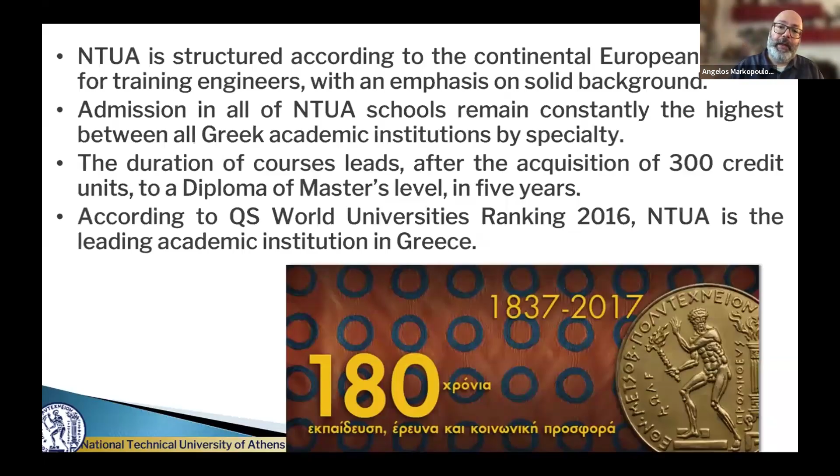So maybe, after I have convinced you that it is worth mentioning machining and simulation, and you would like to know more about this, you can check NTUA's web page and see the postgraduate and doctoral places that we have there, and maybe you can apply for a place there.

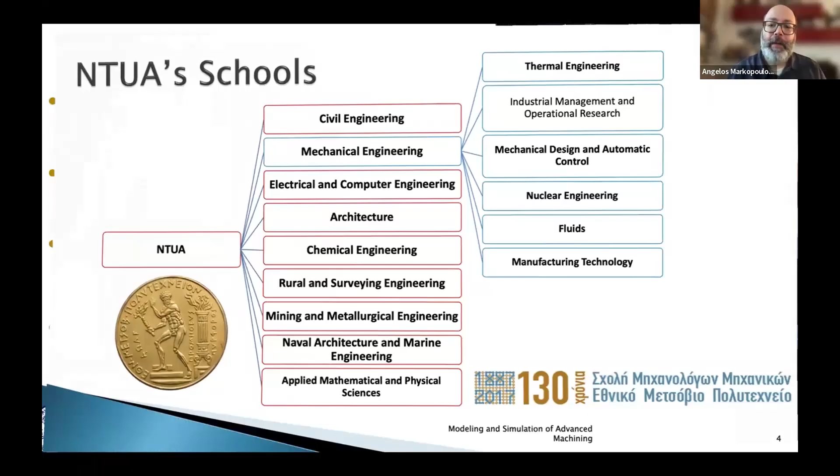Research is our main goal. Education is equally important. We have more than 250 European projects, which ranks us 10th among EU organizations, and there are a lot of them. Not 10th as a country, but as a university. So it is rather important.

And of course, we have several distinctions on that, because if the income of the university is largely from research, you realize that we also have the infrastructure that we would like to have. This is a necessity for Greek modern times, because although we are a state university, the support that we get from the state is very low, so we have to turn and show our expertise to the European Union and get our funding from there.

We have a staff of about 400 professors, which also means that we have like 15,000 students. We are not a big university in terms of students, because we are only a technical university. But nevertheless, if we look into the technical specialties of other universities in Greece and abroad, I would say that we are quite big.

And there are a lot of opportunities to visit and do your internship or postgraduate studies in Greece. I will not bother you more about this.

Let's go and see why machining, or advanced manufacturing, is important. Actually, why modeling and simulation of machining is important, and how we can bring a couple of things together in order to assist ourselves in improving as engineers.

I will start historically by mentioning that machining is very old. We know we have specimens from ancient Greece, ancient Egypt, India, China, from all over the world, almost 4,000 years ago, metallurgy and science that man used to manipulate metals in order to produce something. But nevertheless, the systematic study of manufacturing processes, and especially machining, is no more than a century old.

A little bit more, let's say. We will start our journey in a scientific approach for machining from the beginning of the last century, about the beginning of the 1900s, the first industrial revolution. Probably some of you, if you are into machining, will recognize the names of Taylor and Merchant, people who were the first to establish some laws and give us explanations on how machining was carried out. Nevertheless, in order to model initially analytically, and in the future with numerical methods, I'm going to focus right now on how this has evolved.

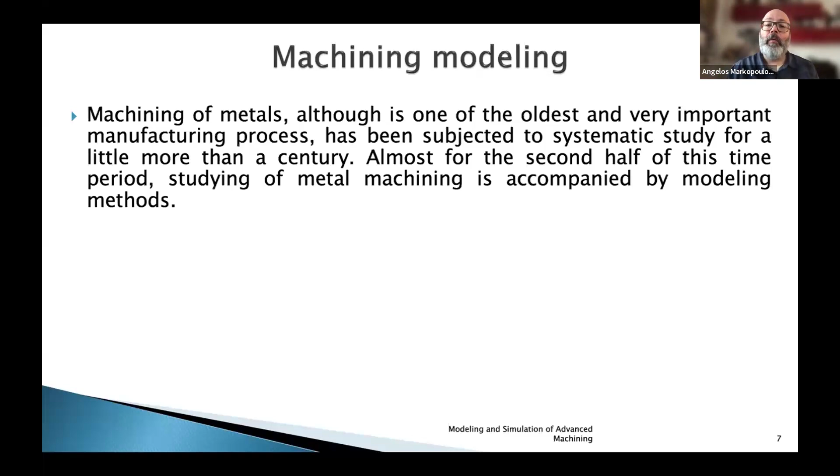It is very closely connected to the materials, to the machines, to the computers that we have, so that we can do more sophisticated modeling in the future. And now I am in a pleasant place to say that modern machining and modeling go hand in hand in industry, and provide solutions for engineers.

And why would we like to have modeling? The initial objective was to provide a theory, an explanation behind some phenomena that we could see from experimental work, and our brain, which has the ability to see patterns, had realized that there are patterns there. But what is the explanation? What is the real purpose? What is the real reason behind what was happening?

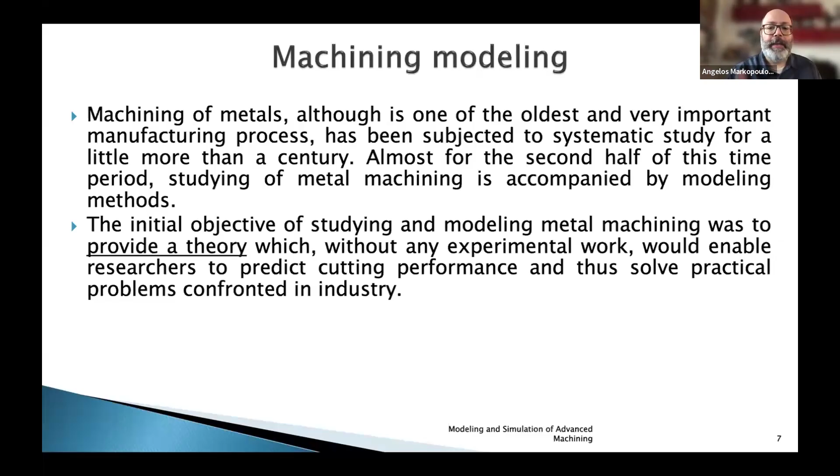So a theory was formed through modeling, tested and validated through everyday practice in life. And one very important thing: using this knowledge to predict the future. Predicting the future is always very useful, believe me. Predicting the future means we were able to predict cutting performance, optimize cutting performance, use new tools, make industry stronger and better.

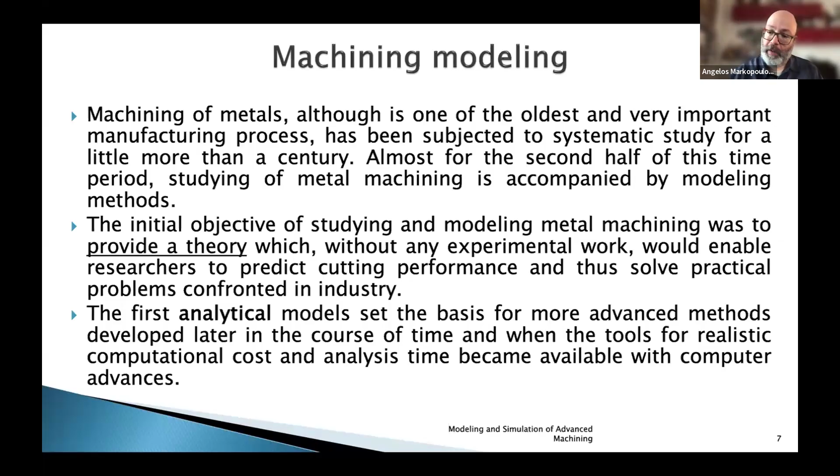So as already pointed out, the first models were analytical, equations solved by hand, which could give us a semi-empirical solution of what is going on. But soon, when computational tools became available, some new methods were presented, and one of them, of course, was the finite element method.

And I have in my mind at least one book, not paper, that speaks against this model and why it is wrong. But nevertheless, because of its simplicity and because it was the basis for more sophisticated models that came in the future, I think it is important to mention it as it is.

Of course, the theory evolved. We have the theory for the shear plane, the shear zone, multiple models that came into existence from gaining more insight from previous models and integrating this knowledge into the future.

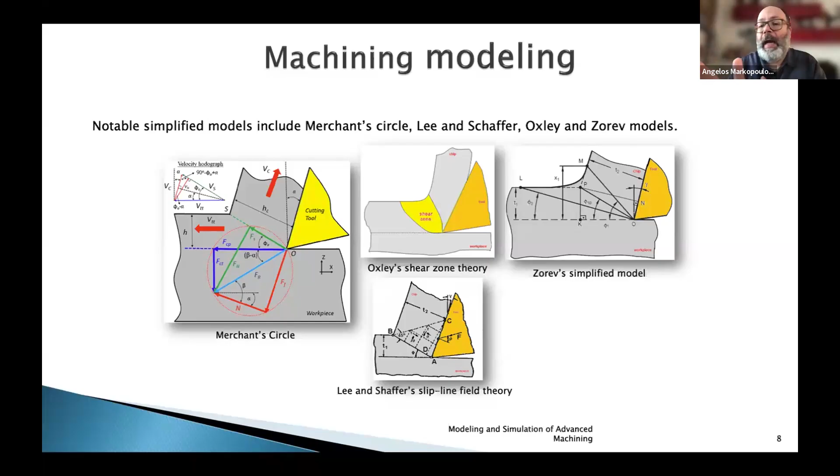You can see also that some of these models are simply qualitative. We do not have any calculations to make there, just a way of thinking on what happens. But this has evolved also much more into taking account more laws of physics and making our models more physically aware. This is a term that is more and more used today because of the artificial intelligence that has also inserted itself into machining and modeling of machining.

Because usually artificial intelligence is data driven, it takes data, a black box, and a result. But if we have physical knowledge, then sometimes we have even better results.

So in the beginning of the 70s were the first papers that came into scientific journals about the finite element method and machining. Of course, the finite element method was introduced earlier for other problems of engineering. I'm talking about the specific pair of finite elements and machining. And since the 70s of the last century, there has been an explosion of using this method in producing results.

So over the years, and with the subsequent increase of computational power, because this plays a very important role, we had several advancements, like for example the existence of commercial finite element software, or even commercial software that is solely dedicated for machining methods.

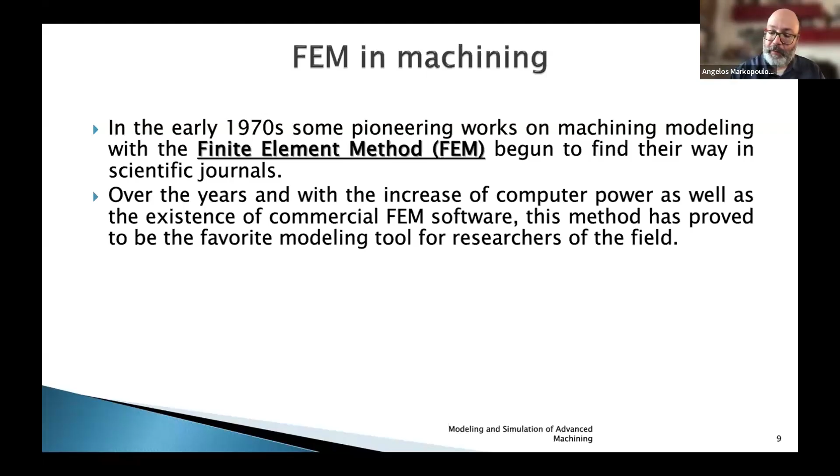So you see that there is a growing interest in these methods, and with the tools that we have today, there is always more to explore.

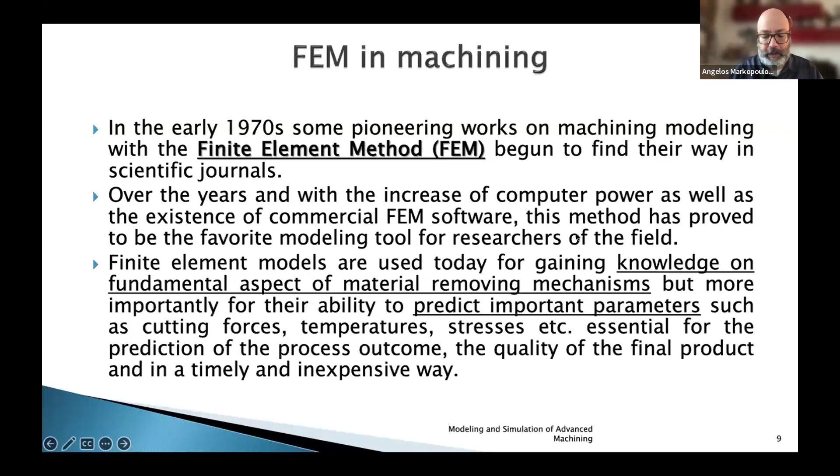But allow me to say that even for advanced matters dealing with how we treat machining, fundamental knowledge is always there and always important. So I wouldn't say that predicting and optimizing procedures is more important than fundamental knowledge. I would give them equal value, these two things that we can achieve.

Many of you, if you have a background in machining, already know what orthogonal cutting is. It's a two-dimensional representation of how a wedge slides on a surface and removes material. I say it in a very quick way, but it has, of course, some other aspects as well.

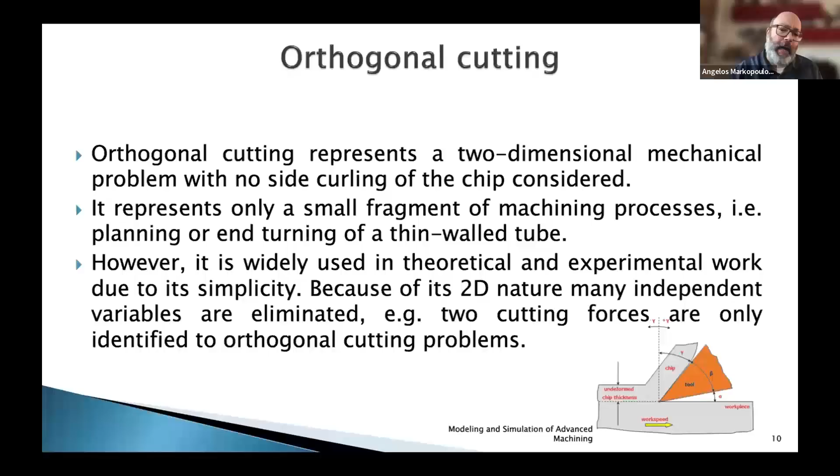This is basic, this is where we started, and this is the first finite element modeling procedure that we had to apply in order to see that it works. I'm not going to go into more details because it is rather fundamental, but if you have any objections, I will be happy to answer any questions.

What I want to point out here is that through this modeling, we have realized that in machining there are two deformation zones that need to be taken into account, both in practice and in modeling. The primary deformation zone is the zone ahead of the cutting tool.

This used to be considered not a zone at the beginning, but a plane. But it was quickly realized from models and experiments that it's not just one plane, it's a whole zone that is deformed in front of the cutting tool. In this zone, the material undergoes severe change in shape, meaning the material tries to resist. We have the so-called hardening of the material because of the strain rates applied there. At the same time, the material has elevated temperature because of the high plastic deformation.

There is also a secondary deformation zone, attached to the chip side of the tool, and because of friction, this area is also at very high temperature. So the problem of modeling cutting is to see what will prevail: hardening of the material due to strain hardening, or softening of the material due to high deformations and high friction between the tool and the chip.

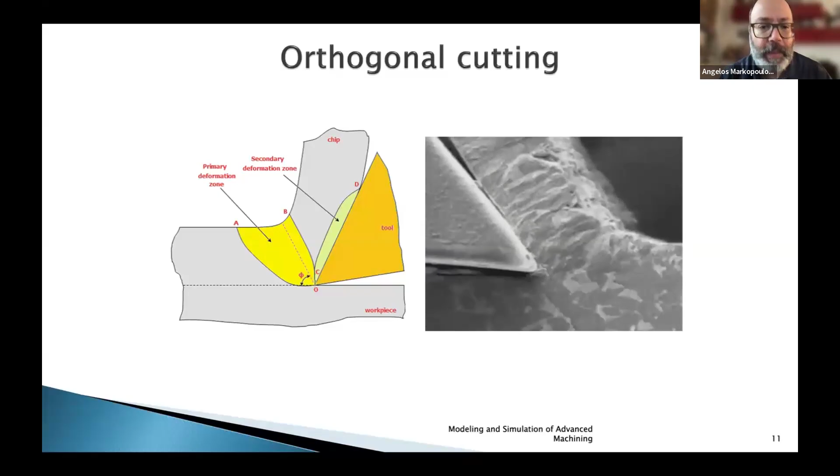And whether there are parts of the material under the influence of one phenomenon or the other. So this is the initial and most important problem we have to solve when we model machining. Actually, this is where the problem starts, and I will explain in a few minutes why I'm saying that.

So, as I said, strain hardening causes the material to exert more resistance to being deformed and cut. Cutting is a deformation in the shear plane, and there's also high temperature due to elevated heat. It has been shown, and we knew this before modeling, that these two very important parameters also influence many other things in machining, such as the wear of the tool and the surface characteristics of the part being produced.

So there is interest in focusing on these two areas, which are very close to the tip of the cutting tool. The first approach, especially when computational cost was very important and our computers were not so fast or so big, was to concentrate our modeling only where this severe deformation takes place, focusing on the tip of the tool.

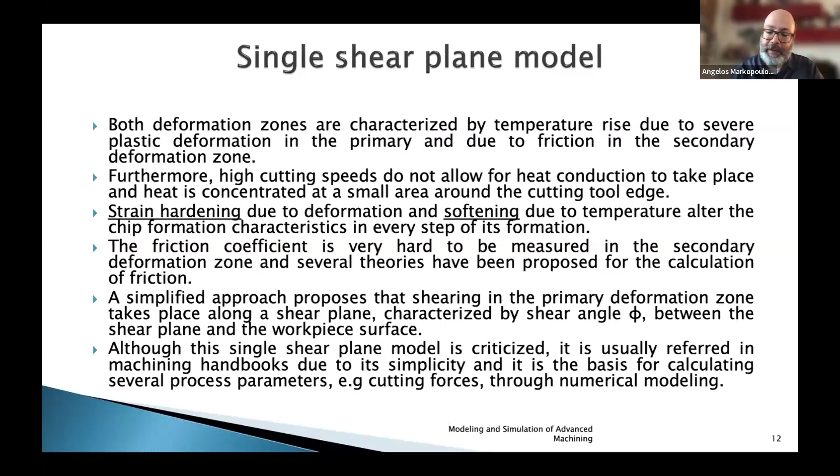And of course, we have to take into account several mechanics about that. I'm not going to go into details, this is out of the question, because I would speak for like 10 hours here if I did that, and I don't want to bother you so much.

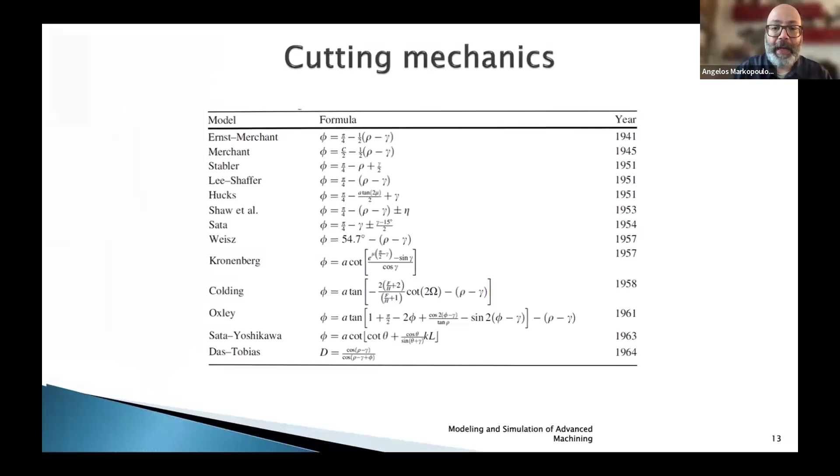But I have here a list of different models that have been introduced about the shear angle plane present when cutting materials, which has evolved over the years.

And now that we have set the problem, let's see what is the solution. So, finite elements, you would argue. Finite elements would be a solution, because it is a very versatile, very agile method, which is able to solve nonlinear problems.

The problem is not purely mechanical, it is thermomechanical. There is strain hardening, which is mechanical, and elevated temperature, which is thermal. Of course, with the change of the parameters of the material, there is also a non-linear change of the properties of the material, because nature is non-linear. So there is non-linearity, and we have to focus on the tip of the tool and the formation of the chip.

Here there are two challenges that we have to address, and they are important. When I talk about this, you will say, okay, this is self-understanding. It is not. Let me give you an example.

The first and most basic problem we have to face when modeling machining, actually when modeling anything, is to provide accurate data for the model. We have to give input, but this input in machining is most of the times problematic. Why am I saying that? You will see in the slides coming afterwards that we have to address our material as an equation, a constitutive law, as it is called in the language of modeling machining. And this constitutive law will give our software a way to understand how this material will interact with our tool.

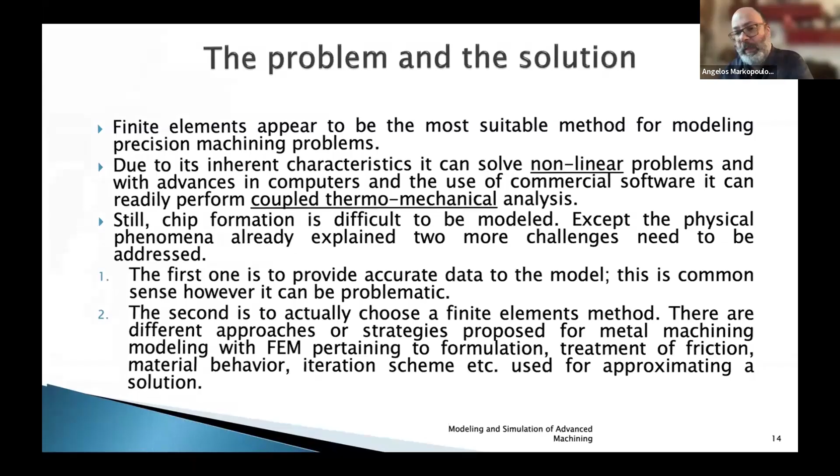It is finite elements, and although, as I told you, with commercial software it is rather easy because you see a very good interface, and it's very self-explaining what you have to put there, and press this button and do the calculation — yes, but our engineering thinking has somehow to give an explanation to the results. And if you have garbage in, then you have garbage out. So you have to be very careful on how you solve your problem, because then you will know that you have the right answer to the solution.

The nodes communicate to each other by a way that we define. And by manipulating one of these tiny elements, there is a wave of changes over the other elements as well. But doing this for only one very small piece of your geometry is much easier and much simpler than doing it for the whole.

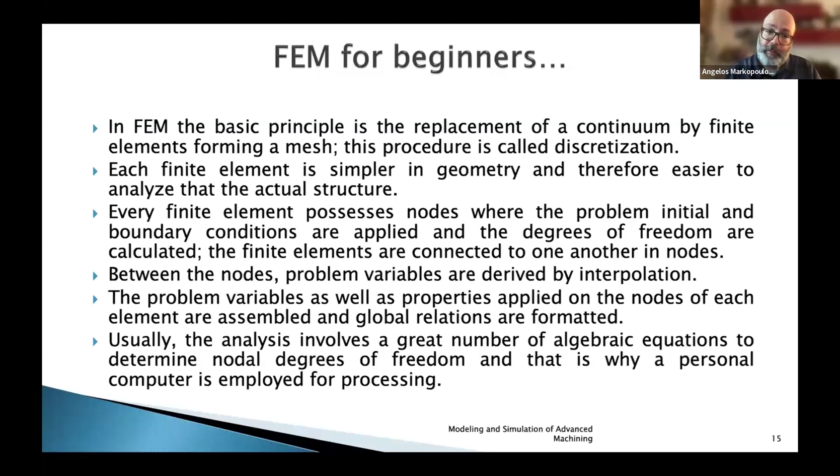So the drawback is that at the end of the day, you have to take all the equations from the nodes and solve them at the same time and provide you with a result. Of course, this needs to be done by a computer. And the finite elements have three distinct steps.

The first step is the so-called pre-processing, where you give all the data that you want for the problem: geometry, the physics you want to put there, the laws behind it—if it's thermal, for example—the boundary conditions and the loads wherever you want them to be. And this will form a matrix equation, then a solution.

Usually what commercial software sells is the solution, so it is the solver that they have developed over the years, and this solver has some very specific characteristics.

The third step is the post-processing, where you collect all the data. That data can be collected over time or over space, or both at the same time, and then provide different steps, snapshots of what happened during your analysis.

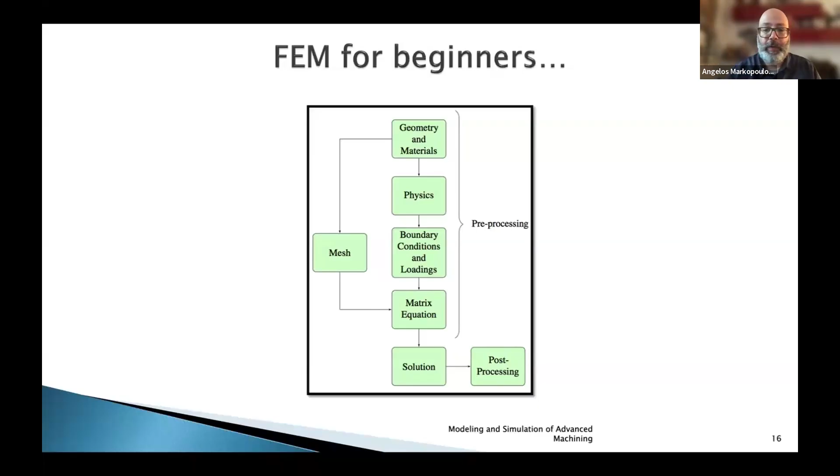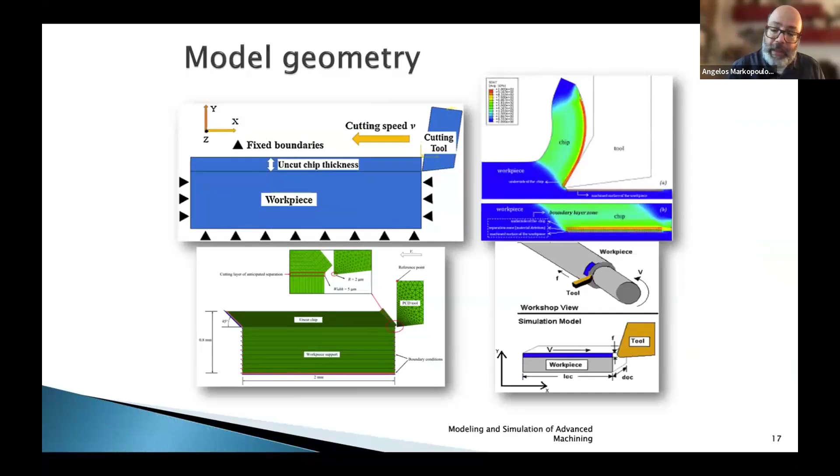The model geometry for machining is usually as simple as orthogonal cutting, but today, as we have more computational power, 3D models can be seen as well, and I will show you some examples in the slides to come.

You can see that model geometry plays a significant role in machining. We know this from practice, but here is a simple explanation: if the tool, for example, is wider, then the primary and secondary deformation zones are also wider. This plays a role on how the material will act and how the chip will be created.

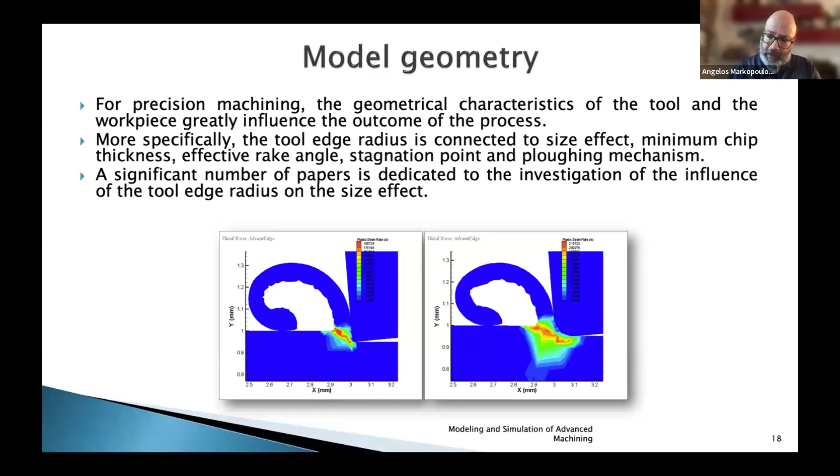And of course, although some people would say geometry is given and straightforward, geometry is something that needs to be carefully thought out and inserted into the program in order to have the results that you would like.

Here are some examples, growing from orthogonal modeling and giving it a third dimension to oblique cutting, which is a little more complicated, or to even more sophisticated 3D problems, where you don't just want your program to give you a result on cutting forces, but also to see how the product will look like after it has been machined.

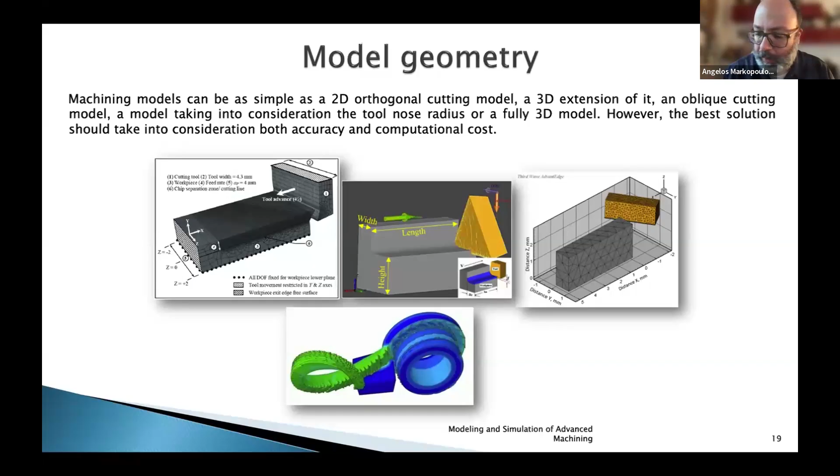And of course, this evolution goes hand in hand with rising computational cost, which thank God we can today accommodate and solve with the computers we have in hand.

As you have already figured out, meshing—applying a mesh on the geometry—is a very important step. This is why most of the pre-processing tools we use have an automatic mesher to do this for us. The mesh is not something that can be straightforwardly determined.

Why does this happen? Because the finer the mesh, the more nodes you have, the more equations you have to solve, and this means more computational cost.

But there's a point where you cannot go to a minimum nor beyond a maximum, because if you go too large, the mesh won't be able to follow the geometry. If you go too small, the gain in accuracy is negligible and not worth the computational time.

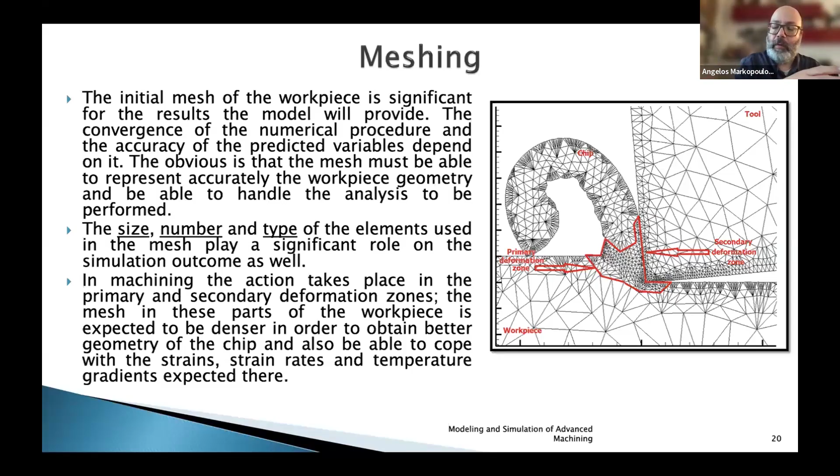So where the action takes place is in front of the cutting edge of the tool, in some very small amounts of material near the tip of the tool. But this phenomenon is dynamic, because the nose, the actual tip of the tool, moves continuously to create the chip.

Before that, types of finite elements, just some of them. It's not an exhaustive catalog, and there are peculiarities and innovations in some programs that have elements others don't, allowing you to integrate more complicated problems.

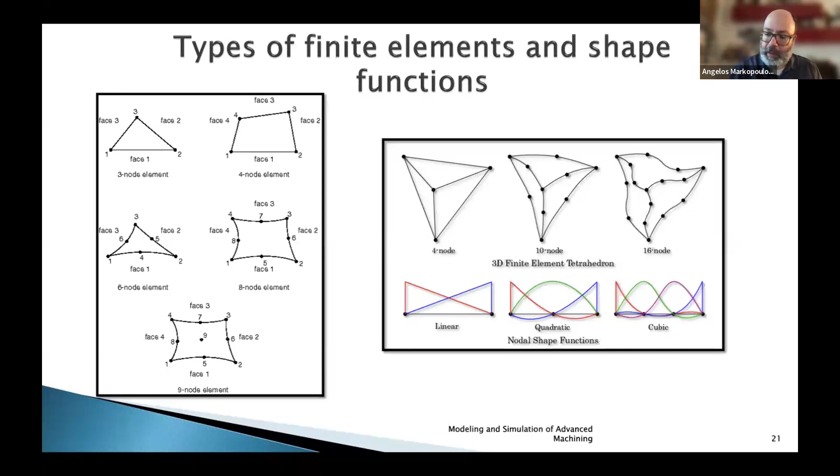You can see there is a wide range of how nodes communicate with each other. They can be linear or of higher order, and there can be nodes not only at the edges of the meshes but also in between, so you get a better interpolation between the edges of the element.

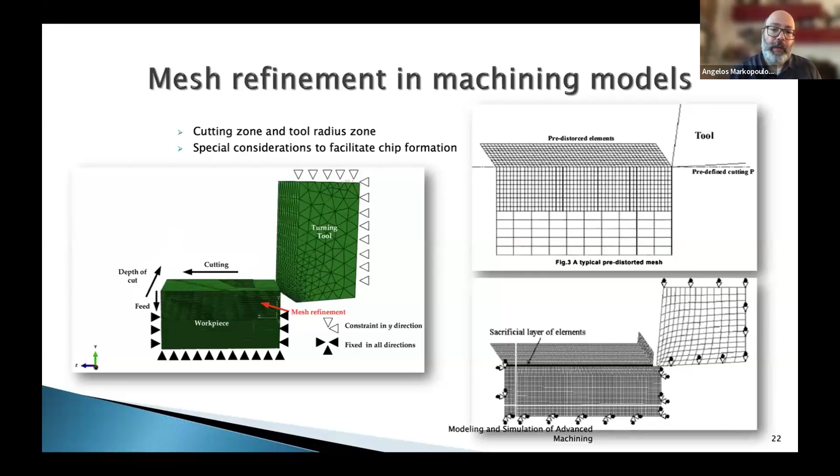And of course, a tool used from the beginning in machining was the so-called mesh refinement. So what we do is use finer and more elements near the tool tip than on the rest of the volume or area, depending on whether it's a 2D or 3D model.

It's not very clear what it is, so you see these elements are very, very small. So not very big deformations are required in order to make them distort too much.

So how can we avoid stopping, killing your simulation because of numerical reasons and not reasons of what actually happens in real life? There was a technique adopted over the years, very common today in many programs, where after each step is finished in the procedure, a new mesh is applied, unique and suitable for the specific time step.

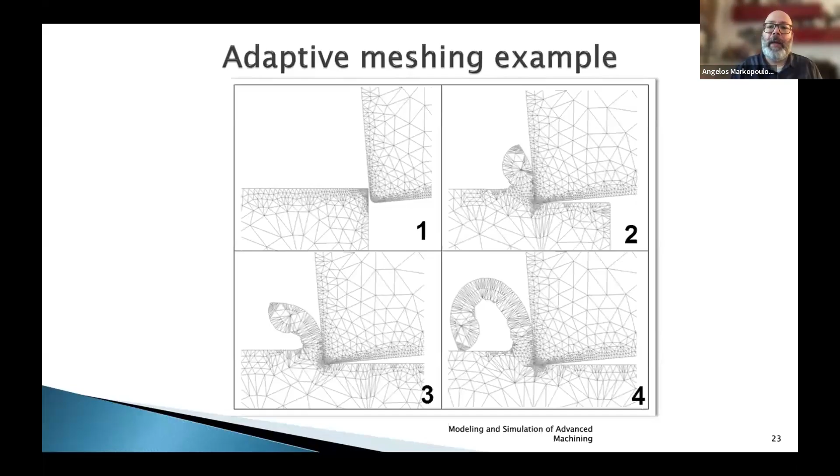You would wonder how chip is created. We know how chip is created in real life, but how is it created in the finite element method? Usually there is a chip separation criterion that we use, and this depends on the scheme of the finite elements that we would like to use.

Is it a geometrical separation criterion, meaning when the tip of the tool is very close to a node, this node is separated into new nodes, thus simulating the creation of the chip? Or is it a physical separation criterion, where the stress, for example, has a threshold, and if this threshold is exceeded, the node is again split into two different nodes?

But there are also methods where the chip is created without a specific separation criterion. It has to do with the topology of the grid. This third option is, let's say, more realistic, because the other two appear like a zipper opening, which was not very realistic.

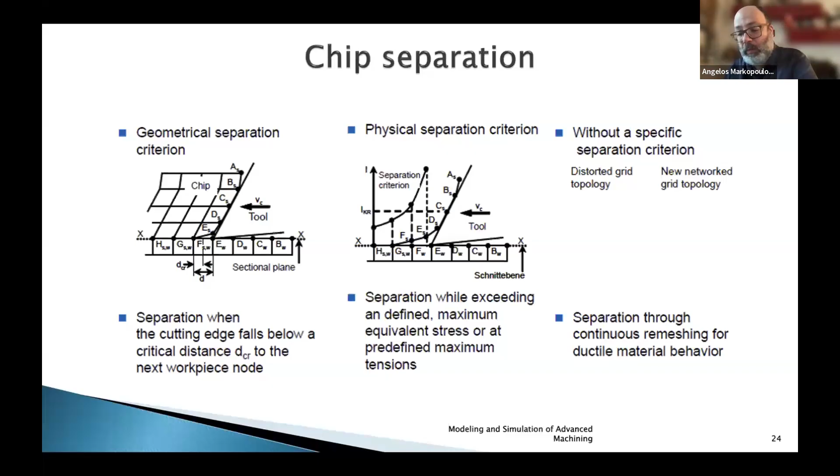But in order to achieve this third method, we have to apply this continuous remeshing, so that the simulation is as close to reality as possible. I will elaborate a little bit more in some future slides that you will see.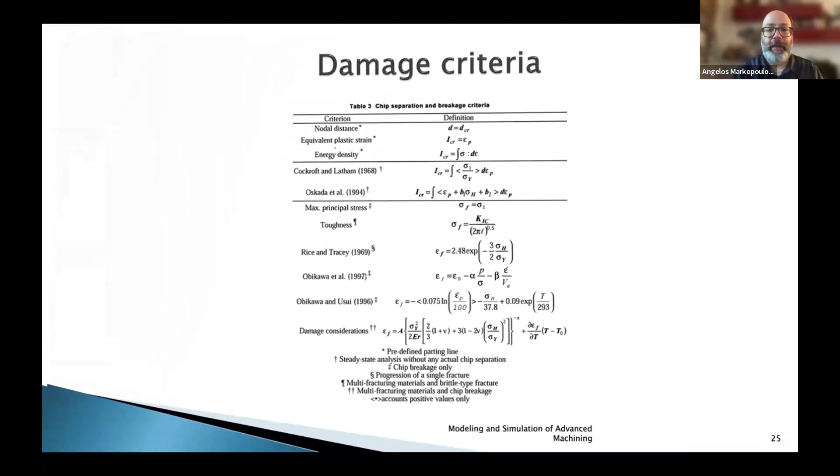And here are some damage criteria that are applied in the case where there is a need for a damage criterion for the creation of the chip, and the thermomechanical coupling. Actually, thermomechanical coupling is not so easy as it sounds.

When I first had my hands on a computer that could actually use software for finite elements, this was like 25 years ago. What I was doing in order to have a thermomechanical coupling project was to first run the mechanical problem, then run the thermal problem, and integrate them together to see what happens.

Today, this is not necessary. There are software that can handle both problems at the same time. This is rather beneficial in terms of time, but also in the interaction of different phenomena, because one has an effect on the other. What we actually have to do here is provide the right data.

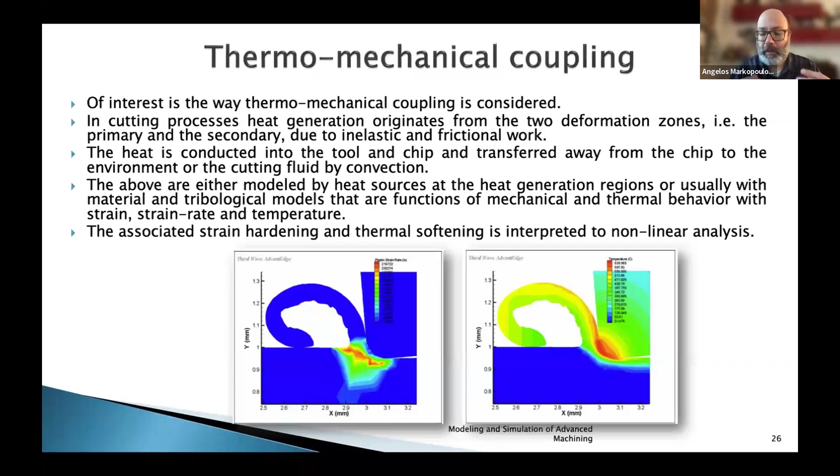As I said, this is problem number one, meaning the parameters for the machining, the properties for the material, the geometry, and a mesh that applies best to the geometry we have. If we do all this, then we can do a thermomechanical coupling at the same time.

Let me now elaborate a little bit more on what we should prepare and have in order to start building a model. What information and knowledge should we have in order to have a very successful model?

We will start with material modeling because, as I told you, it's tricky, and also it is fundamental because different materials would require maybe different models, even different scales of machining would require different material modeling. For example, it would be quite different behavior of a material if it was a micro cutting model that we would like to build. And the problem again is that in the primary and secondary strain zones, we have very elevated temperatures and very quickly changing situation on the material deformation. Plastic deformation, not elastic, plastic, so very severe.

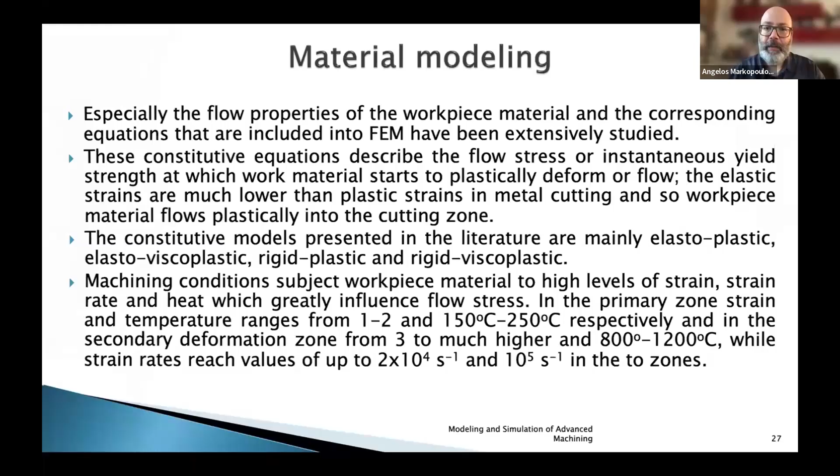And the cutting zone is a place resembling hell, let's say, for conditions, which evolve very fast, and we have to make this real. So material modeling is number one. Over the years, we have a lot of models that have been proposed.

Initially, very simplistic ones, then taking into account more and more parameters. Sometimes these parameters need some specific tests in order to assign some properties. For example, if we want to give material properties, then we would need a split Hopkinson pressure bar impact testing in order to get mechanical properties for the material, which is a very difficult installation to find in laboratories all over the world.

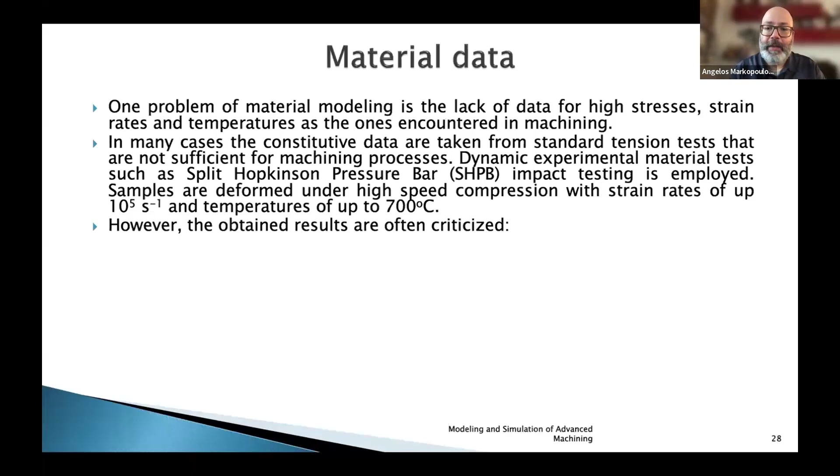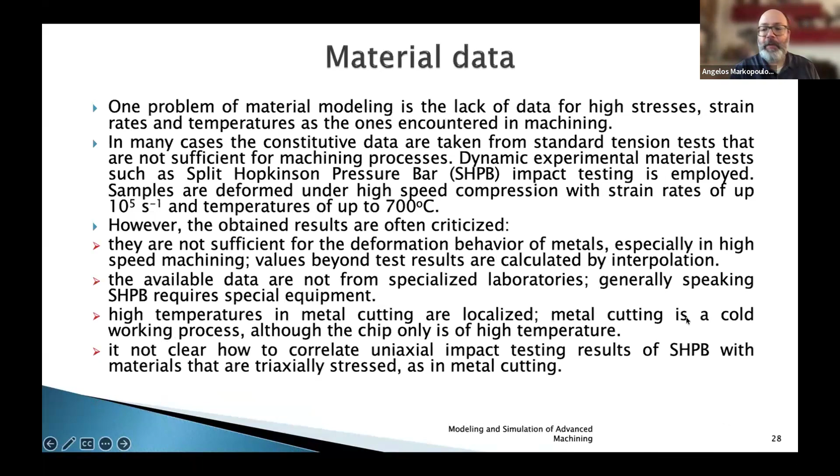This is why results are criticized, and this is the reason that this happens. So not specialized laboratories, not specialized tests, not a correlation of the right conditions of testing to the identical conditions of machining that we would like to simulate.

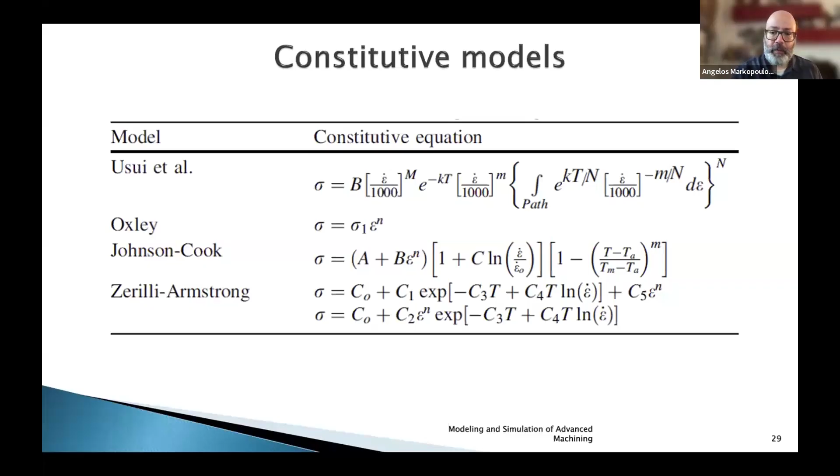And over the years, various constitutive models have been proposed. Here I mention only a few of them because these are the most used ones. And probably if you have ever come across a modeling of machining, you definitely have come across the so-called Johnson-Cook, or JC model, which is the most complete one in terms that it takes into account the deformation characteristics and the temperature characteristics, the strain hardening and the thermal softening that we talked about in previous slides.

And you see that if we divide this Johnson-Cook model into the three terms that it consists of, you will see that the tests that we need in order to determine the coefficients for each part are coming from very specific laboratory equipment, and they are not the plain mechanical tests that we do in room temperature with just one testing machine.

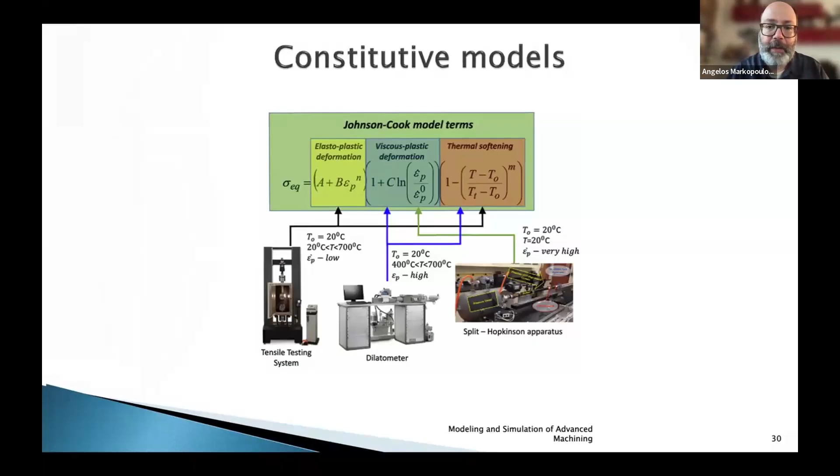And here is where I would like to make, let's say, a parenthesis or an upgrade for the presentation about multi-phase materials, because this could also include composite materials that is the main topic of this event that we are now. And it's not only about that, because many materials are multi-phase.

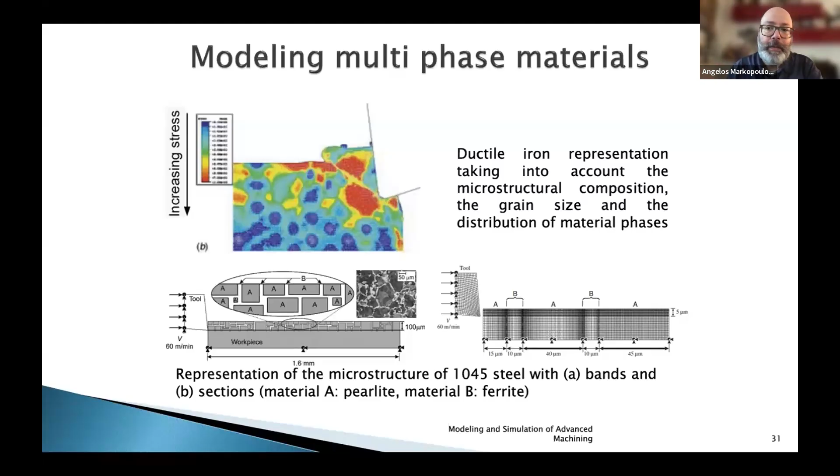For example, ductile iron or some steels which have distinct bands of carbon or other materials that are inside them. And in order to make this modeling, that means that maybe we have to assign to different parts of the model of the material different constitutive laws or at least different properties. And this makes, of course, our job more complicated, but nevertheless more accurate. And this is something that is important. Remember that machining is always accurate, so you have to have the corresponding accuracy also in models.

And here, for example, are some examples that I have gathered from the literature about modeling of composites, where you can see it is either composites with particles or composites with fibers. It's different kind of modeling and different kind of representation in the software that we have to use.

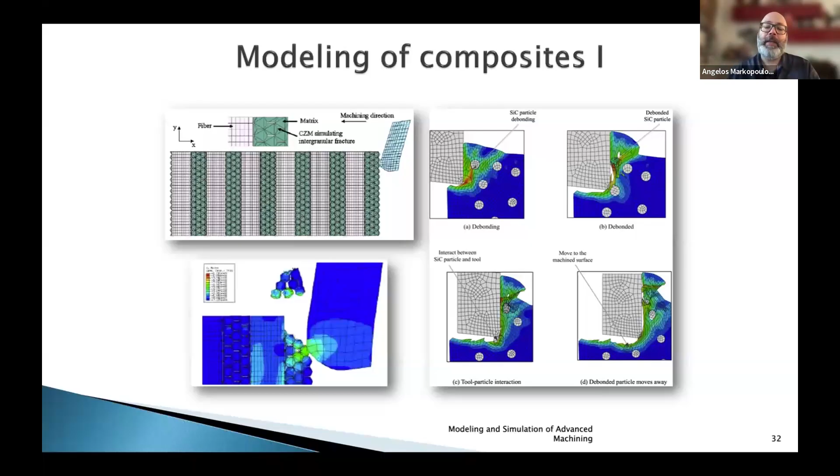It's kind of a composite material, has the corresponding geometry, meshing and boundary conditions, because you have somehow to give the software to understand that these different materials work with each other. So there is friction and there is a connection between them. It's not just material that is glued the one next to the other. And this makes, as I said, the analysis much more complicated.

So you can see here, for example, a metal matrix material with grains, particle reinforcements, and how it is represented both in terms of geometry and meshing.

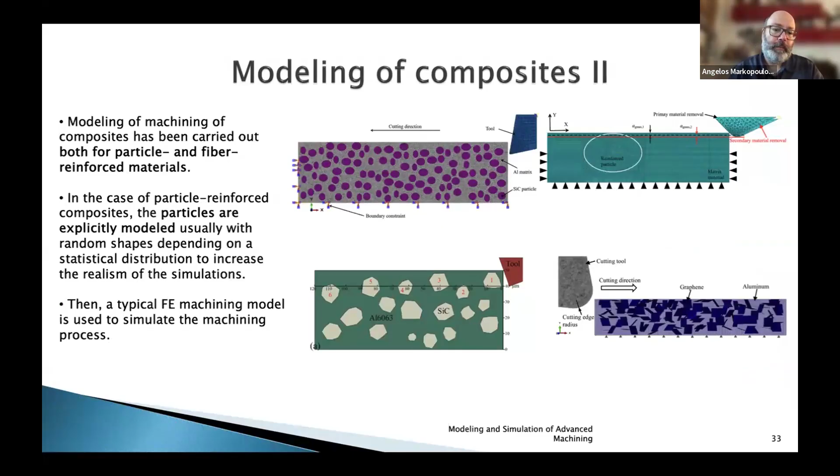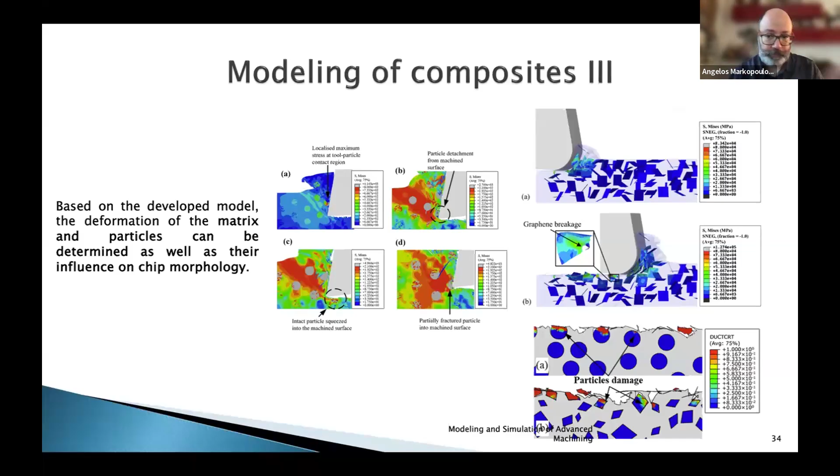And here is also how the tool deforms the material, creates the chip, and how the chip is different from what we saw in previous slides, because there is a difference on how the chip evolves. This gives different results also for stresses, for cutting forces, and for the surface characteristics of the material that is left behind.

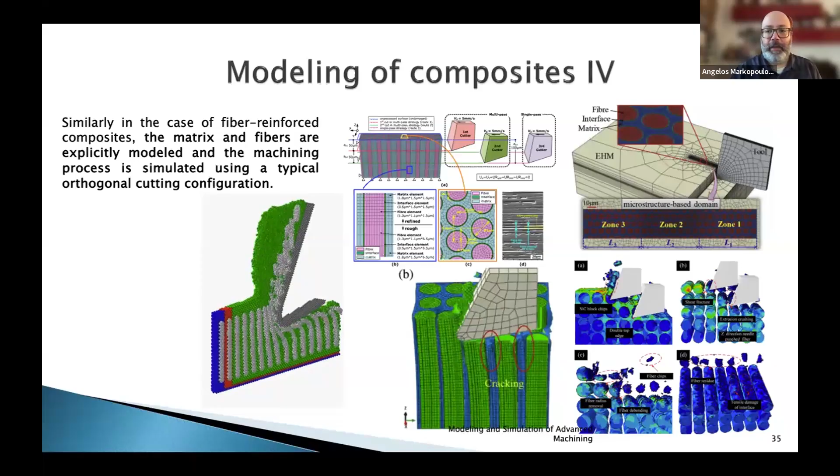And here a short video. Of course, this is not finite elements. It is something different, which I'm going to talk a little bit about in the coming slides. But I know that there is also a presentation after mine today.

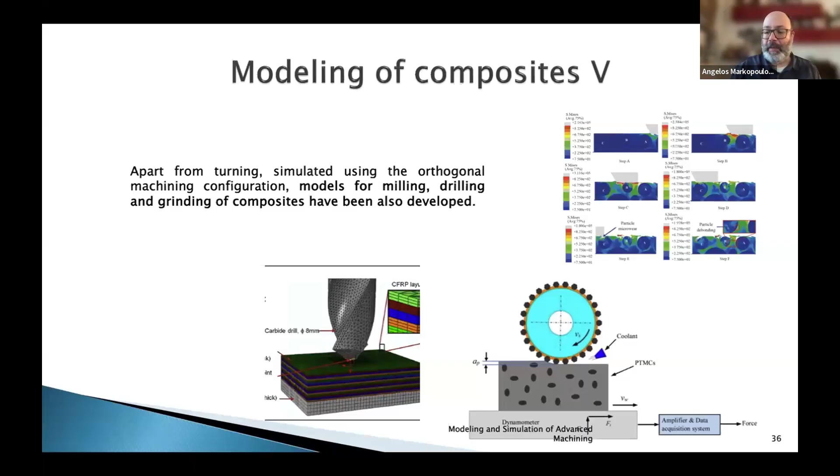Finally, I have to also add here that if you look into the literature, you will find not only models for orthogonal machining—orthogonal machining, of course, is the majority as it is in normal machining as well—but you will also find models about drilling of composites, grinding of composites, and all manufacturing processes that exist, and there is an interest in modeling.

So now that we have our information on the material and we know how to build this model in terms of geometry and properties for the material, then the next step is to determine a friction model. This also may sound like it is very easy, but it isn't, I assure you.

If you look into the literature today, you will see that there is a very simplistic approach on how friction is applied. There is usually a fine-tuning procedure where you change the coefficient of friction in order to match your modeling results with the validation data that you have. In my opinion, this is not correct because it is not a general model. You have to adjust it every time to the condition. But friction is a very, very complicated problem and has to be addressed in a very complicated way.

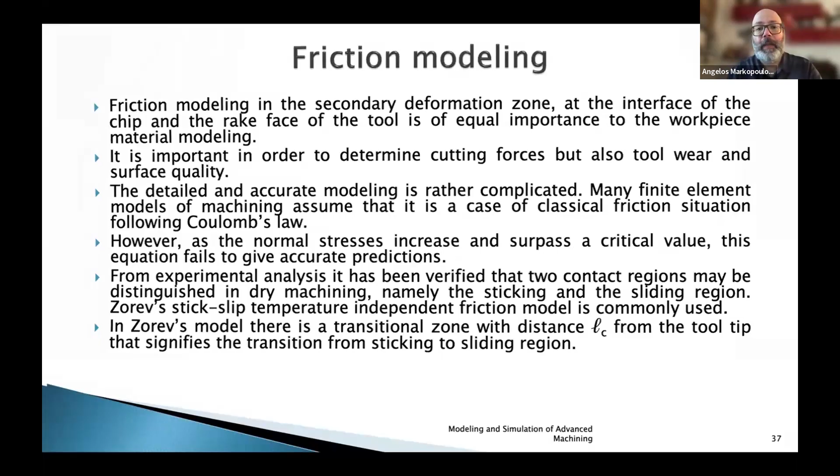There are, of course, again, some proposals on how friction can be inserted in machining. Let me remind you that I'm talking about the friction between the tool and the chip at the cutting edge of the tool, where these two kinds of materials interact together.

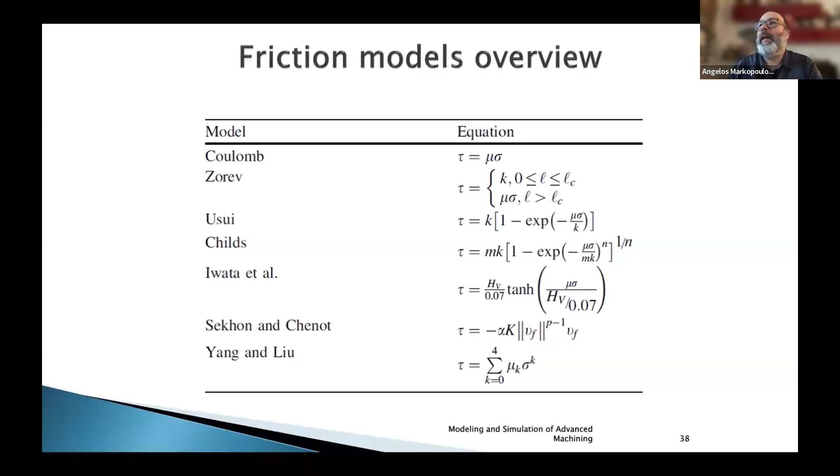We can determine where this zone starts and stops by several tests, and in this area the coefficient changes dynamically because of the parameters, because of how the conditions of machining change, and this is usually the most efficient way to address this.

If we have these two things, material modeling and friction modeling, then we can add more things if we want, tool wear, for example. This is not straightforward. The finite elements cannot actually give you the tool wear rate. You have to insert some kind of code there to tell your software that after this happens, then this tool wear can be

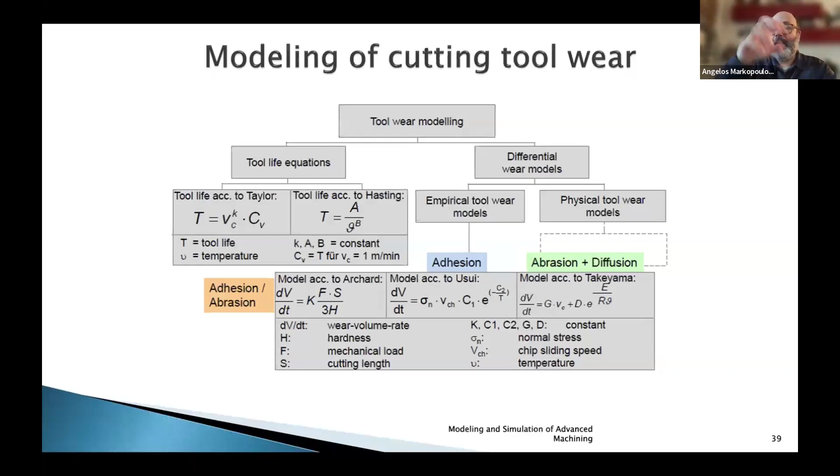visualized, manifested in the procedure. So actually, this is not quite something that can be calculated from the finite elements, but it can be inserted in a certain way, taking data from the analysis and providing results. For example, you can see here some results and a diagram of how we can insert this through a subroutine in the program in order to take into account the wear.

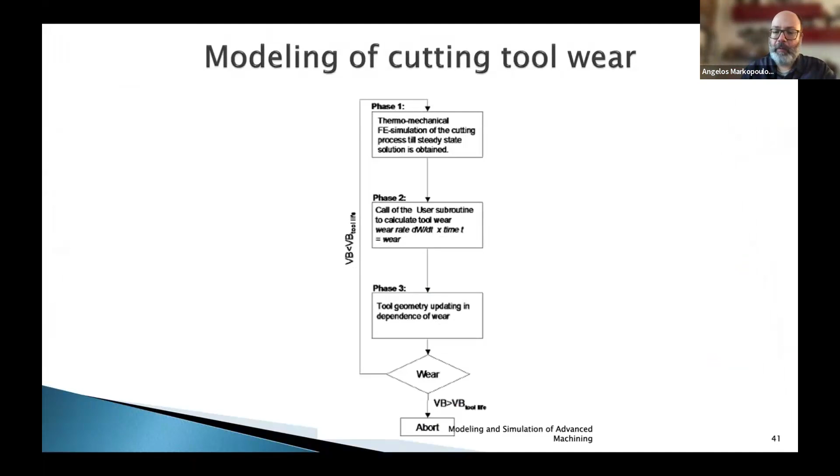But wear and surface finishing are not things that can be seen from the finite element models. An important parameter, however, is about cooling.

Machining, usually—I would say always in industrial practice—but I have come across some very specific industries that avoid using coolants in order to perform their machining. Nevertheless, there is a very high probability that you will have some kind of cooling in your machining procedure.

This is very, very important because it takes away part of the heat that otherwise would remain in the chip or the tool and would change the situation. Or it has to do with lubrication. So in both cases, it interacts automatically with the first two things that we said, the material modeling and the friction modeling.

So usually how do we take this into account? Either we insert thermal boundary conditions in the finite element model, or, a more complicated approach that usually isn't done in one software procedure, we use a different kind of modeling, usually the CFD method, in order to simulate how coolant flows around the area of machining and removes heat from the tool.

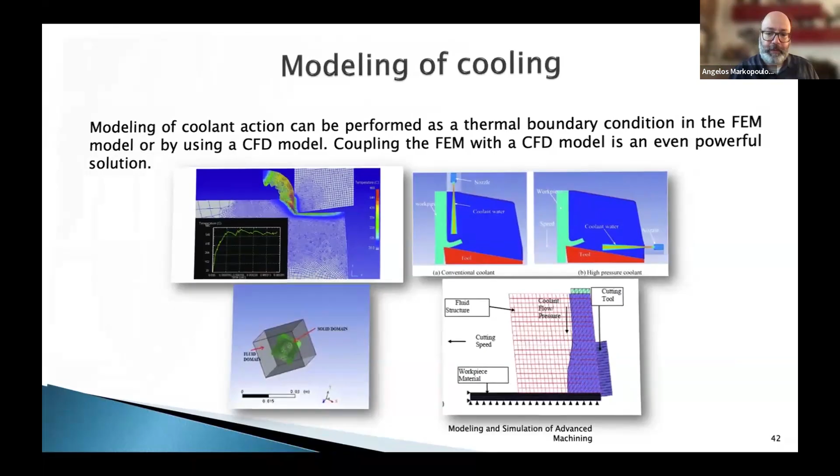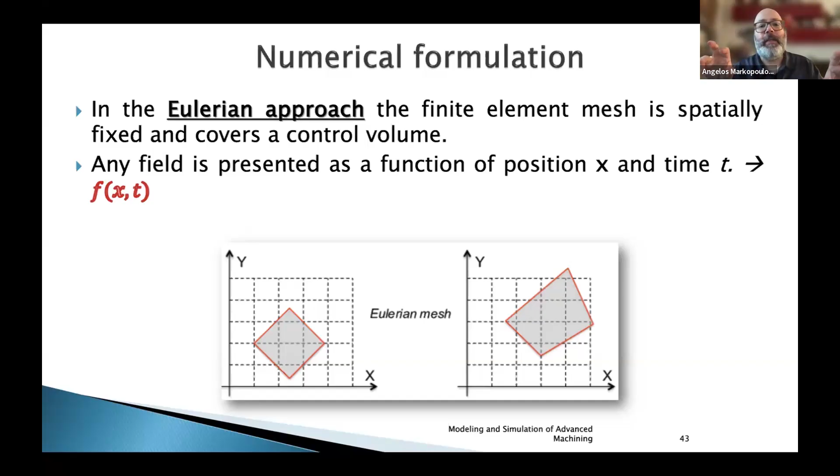So another important aspect is also the numerical formulation. There are basically two approaches: the Eulerian approach, where the finite element mesh is fixed in space, and the Lagrangian approach, where the mesh is fixed on the material. And what is the difference, you would argue?

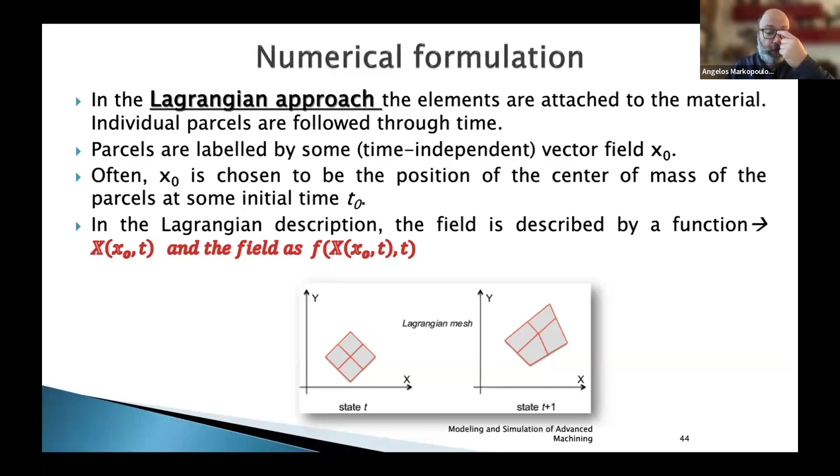How would we know what is most appropriate and what is not? We can explain it in mathematics, but let me give a more easy explanation. I'll try to explain it as easy as possible.

So in machining, if you use an Eulerian approach, the finite element mesh is fixed over a control volume. So you have to pass your geometry through this fixed mesh, and this is how you create the chip.

This is not so intensive in terms of computational cost, but in order to do that, you would need to know a priori how the geometry will change over time. So you have to have different machining experiments, observe how the chip is created, draw this chip into your model, and have your geometry pass through these discrete in time phases of the machining.

On the other hand, the Lagrangian approach doesn't need to have a priori knowledge of anything. So the elements are attached to the material. The material interacts with the tool. It is deformed because of this interaction, and the mesh is deformed with the geometry of the material.

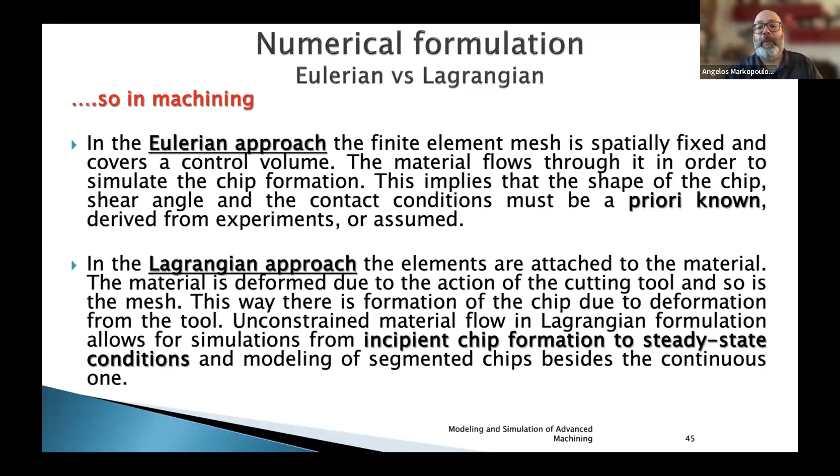Or you would also need a law, a modus of creating the chip from step to step. And this is either by giving some criterion in order to do that, or in the arbitrary Lagrangian Eulerian approach, called ALE for shorter. This is, let's say, a merging of the two different approaches, where there is one step that is Lagrangian and one step that is Eulerian.

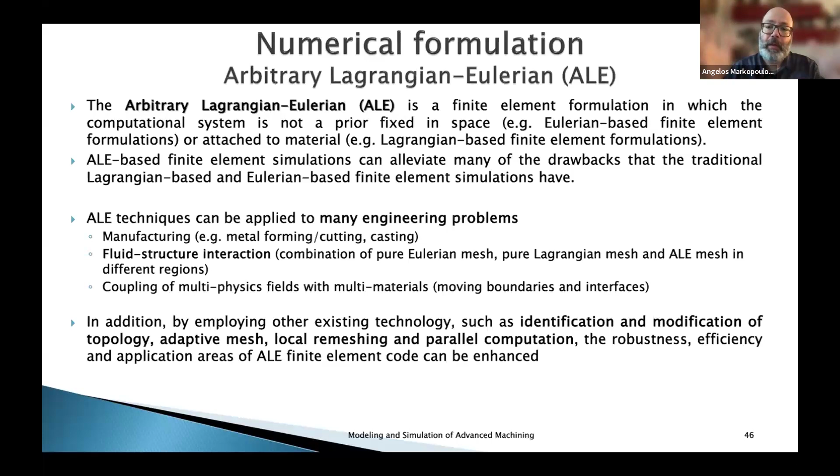And then you skip from one to the other in order to represent the new situation in the next time step, produce the results, and then formulate again in the other method in order to have the result. This approach is more complex in terms of computational cost because you would require more steps to be modeled and also a lot of information to be given.

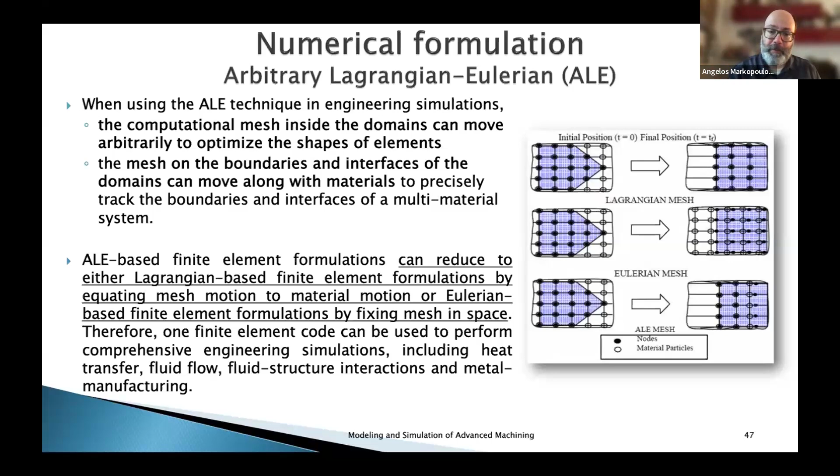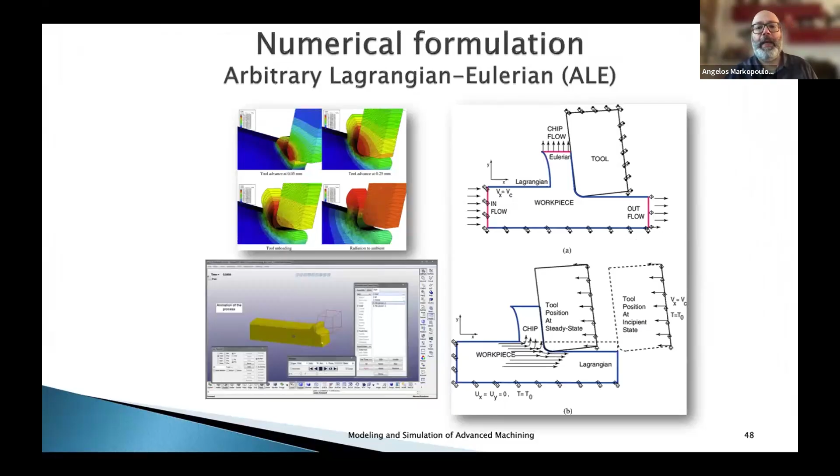From my experience, the Lagrangian approach is much more common than the others. Nevertheless, there is also the possibility to apply one of these. However, if you see here some results from the arbitrary Lagrangian Eulerian method, you will see that it produces more smooth results than the other two.

Here is also an example of such a simulation.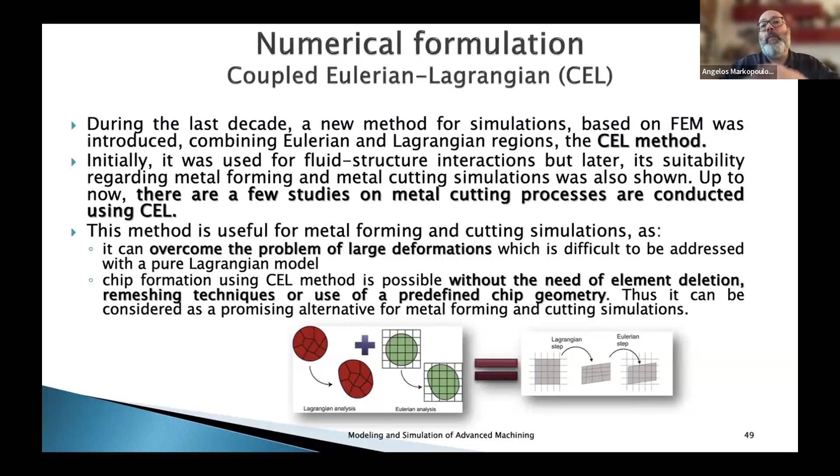Of course, as I said, because there is a danger of overflow in some elements, the elements are not distorted, so this is why you don't care about large deformations. So if there is an overflow, you have to design them bigger, and this means that you would require more capacity for computer power, and sometimes it's not very fine in results as the previous approaches.

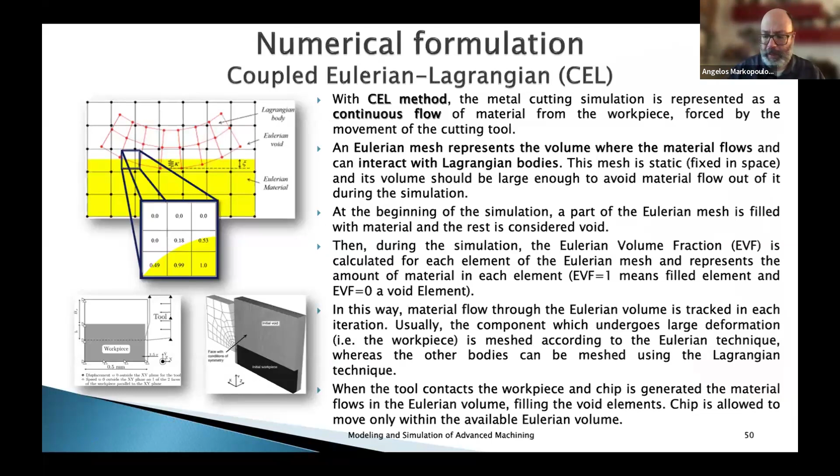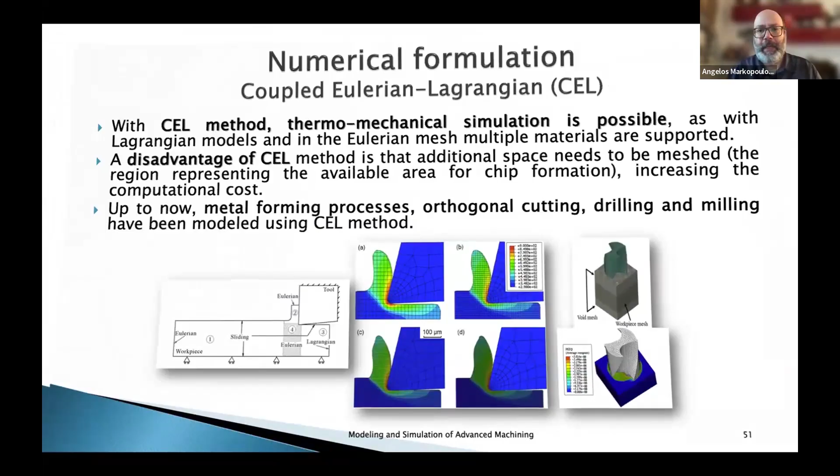Nevertheless, it is an interesting approach, and as I told you, I see it more and more in papers nowadays. I will not go into much detail about how it is formulated, because it will take some time, and go to the next step, which is about the time integration scheme.